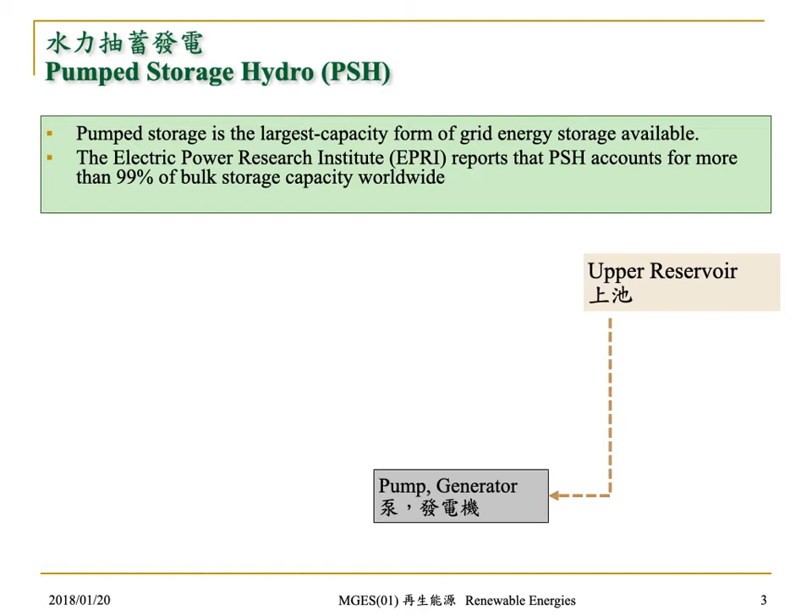Pump hydro storage is a large capacity energy storage for the grid scale at the present time. I think everybody knows the basic principle, but anyway, I'll repeat it. It stores the electricity as potential energy. They use the upper reservoir to store a huge body of water. When they need electricity, the water is released from the upper reservoir through a power generator to the lower reservoir, and generates electricity.

But when you have excess electricity, you can feed it back to the pump. The generator becomes a pump and pumps the water from the lower reservoir to the upper reservoir, storing it in the form of potential energy. The energy storage efficiency is somewhere around 70 to 80%, because of mechanical loss and water evaporation in the reservoir.

But newer pump storage also considers the environmental and biological balance. For instance, pump hydro is usually built along the river. They cut the river and bypass the water through the generator. Traditionally, fish flowing through the river may get interrupted or sucked into the power generator or the pump. To avoid that, there is usually a protection grid or mesh so the fish are not accidentally sucked into the power generator.

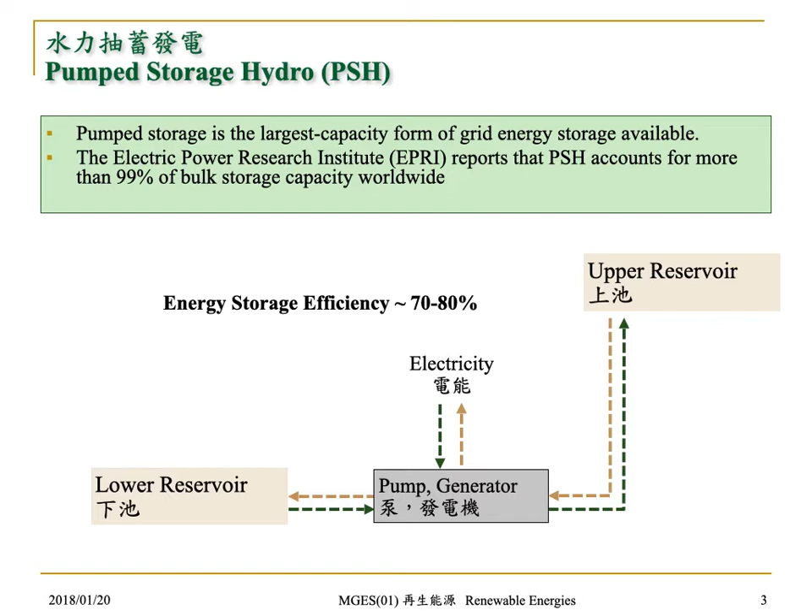Inside the power generator or pump, the turbine is made environmentally friendly, maybe coated with plastic or Teflon and without any sharp objects, so even if fish get sucked in, they will not be seriously injured. They also build a bypass so the fish can flow through the river without interruption. So newer pump hydro not only considers high efficiency, but is also environmentally and biologically friendly.

The same machine can generate electricity, which we call the generator, or become the motor to pump the water from the lower reservoir to the upper reservoir. I use a model from the pump hydro station with a cut section, which makes it easier to describe. This is the motor or power generator over here, and in front it is connected with a pump or turbine. Whether it's called pump or turbine depends on whether you want to pump the water upward, or the water from above pushes the turbine to generate electricity. So one device has two names, depending on its function.

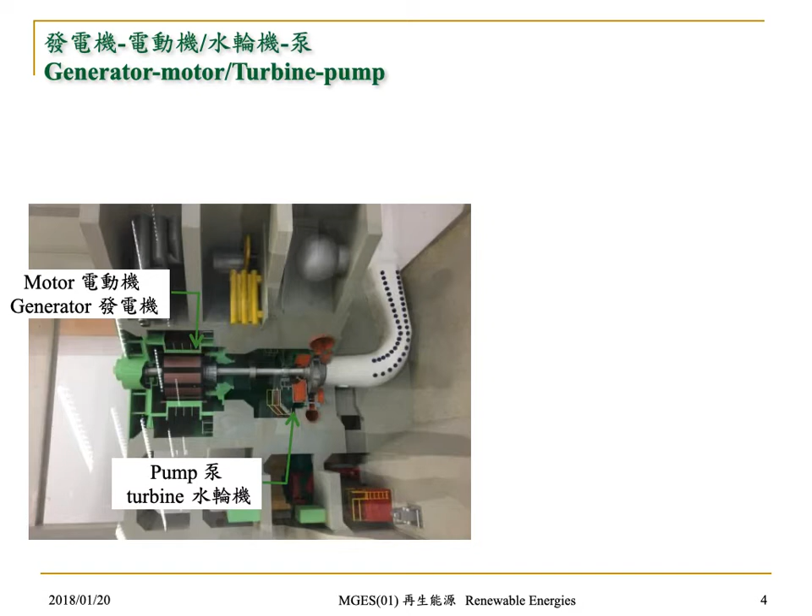This is a close-up of the turbine or pump. It rotates in one direction depending on whether it is a power generator or acting as a pump. The typical specification is given by this table. The generator output is around 300 million volt-amps, and the motor input is 283 megawatts, or 283,000 kilowatts. They are very close, and the turbine output is 275 megawatts, or 275,000 kilowatts. The turbine or pump is a very close match with the generator, no bigger, no less.

The maximum effective water drop is 400 meters, and the maximum flow rate is 82 cubic meters per second. So we can calculate the power output from the water drop times the flow rate. We know how much potential energy can theoretically be released, and then calculate the turbine output or generator output. The maximum lift is how high the pump can pump the water up. This maximum is 410 meters.

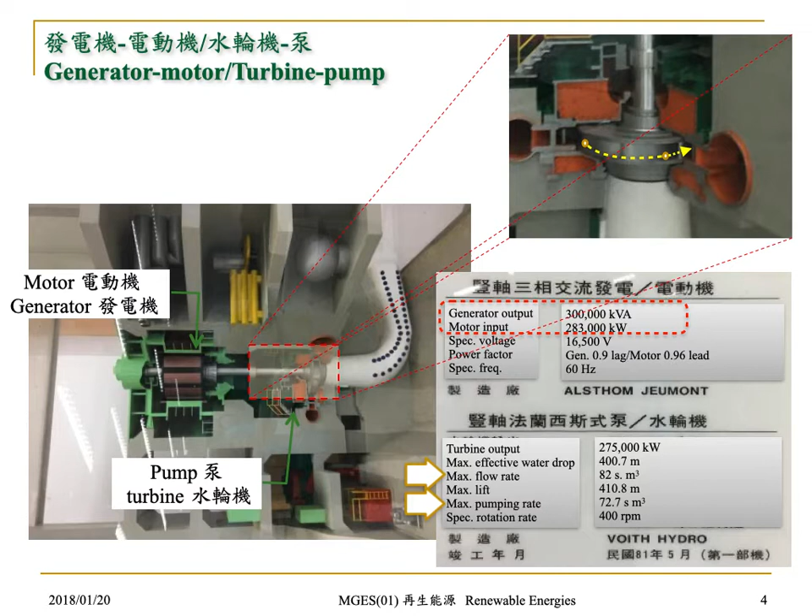In this power station, the elevation difference between the upper and lower reservoir is somewhere around 300 to 370 meters, so it's within the specification of the pump. There's no problem pumping the water from the lower reservoir to the upper reservoir. And the max pump rate is close to the maximum flow rate downward.

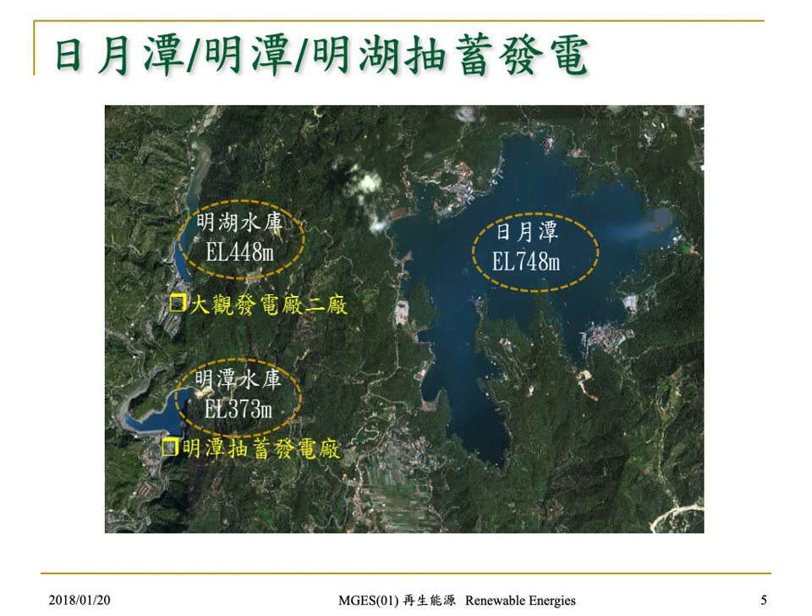And usually in the battery, for the energy storage, mostly for the battery, we'll talk about the energy density. That means how much weight or how much space is needed for batteries to store a specific energy. But not too many people talk about the pump hydro. We just do an experimental calculation, see how it will come out.

For the pump hydro, actually what is stored is potential energy, PE, equal to MGH. The M is the mass of the water, and then G is the gravitational constant. It's 9.805 meters per second squared, and then the height is the elevation difference of the upper reservoir and the lower reservoir. Let's consider an experiment.

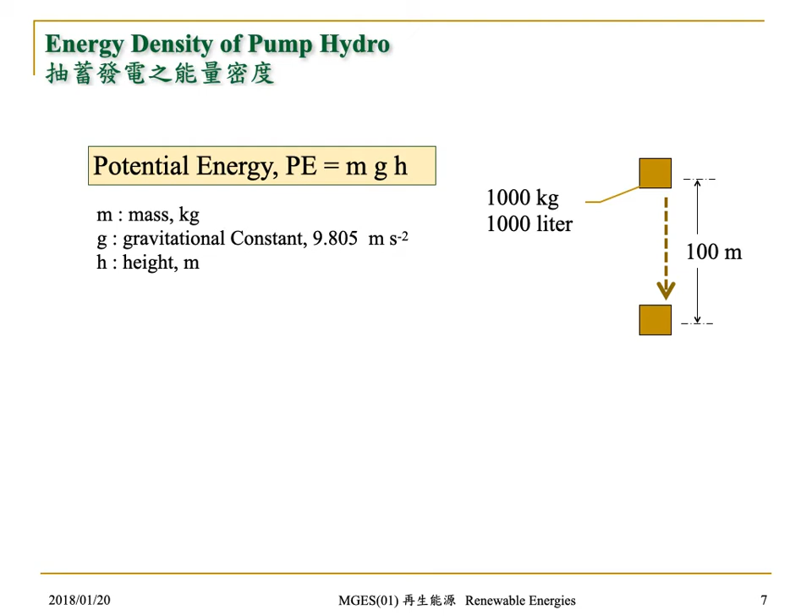We had 1,000 kilogram of water. That means 1 ton of water, or 1,000 liter, 1 cubic meter of water drop from 100 meters above, drop to the ground. And then we'll convert all the potential energy into electricity, 100%. How much electricity will be generated? We can calculate by this.

Then you can see the M equal to 1,000 kilogram times the gravitational constant 9.8, and then times the height 100 meters. Then we got 274 watt hour, or 0.274 kilowatt hour. 1 watt hour equal to 3,600 joule. So this is the energy unit conversion. So we know in this experiment we can get 0.274 kilowatt hour electricity by running 1,000 kilogram of water from the top 100 meter drop to the ground.

Now we're going to calculate the energy density. The energy density we can base on weight or based on volume. The weight is 1,000 kilogram, but the volume we have to consider is 2,000 liters. Because there's an upper reservoir and lower reservoir, we need both reservoirs in order for this operation to be feasible. So we need a 2,000 liter space. So we do the calculation. Then the gravimetric energy density is 0.274 watt hour per kilogram, or the volumetric energy density is 0.137 watt hour per liter.

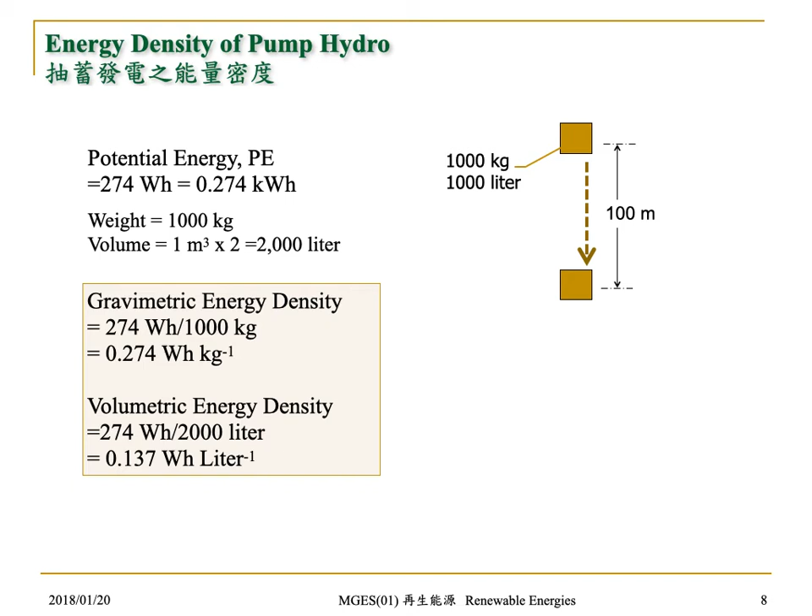So, is that good or bad, the energy density? We compare this number with conventional batteries, such as lead acid battery and the lithium-ion battery. The lead acid battery is considered the lowest energy density among all the batteries. The energy density for lead acid battery is somewhere around 20 to 50 watt hour per kilogram. It's about 100 times higher than pumped hydro. For the lithium-ion battery, it's 200 to 400 watt hour per kilogram. It's more than 1,000 times the pumped hydro. So you can see the pumped hydro energy density is much lower.

But everybody actually doesn't care about that, because usually it's in the natural environment, and it's pretty, and it also needs a big body of water, but it doesn't matter because usually it's far out west, in a remote area. You cannot do this in a metropolitan city, because the land space is limited. Then you really need a battery to do the energy storage rather than the pump hydro. The pump hydro is good for central energy storage, but not for distributed energy storage. For instance, building it in your downtown, your basement, that will be impossible.

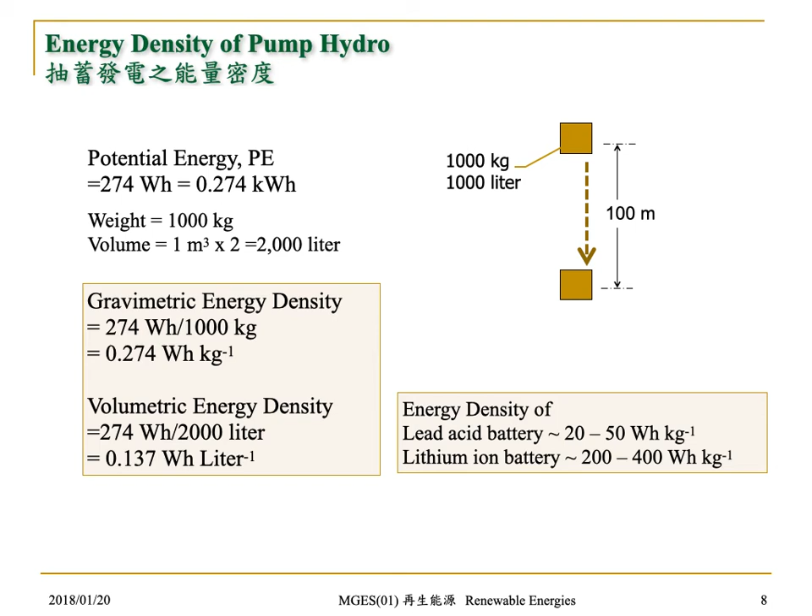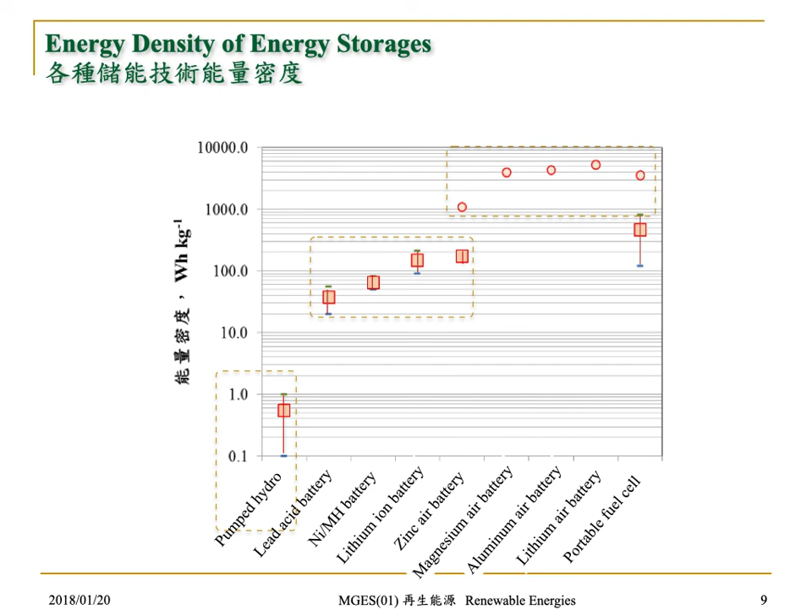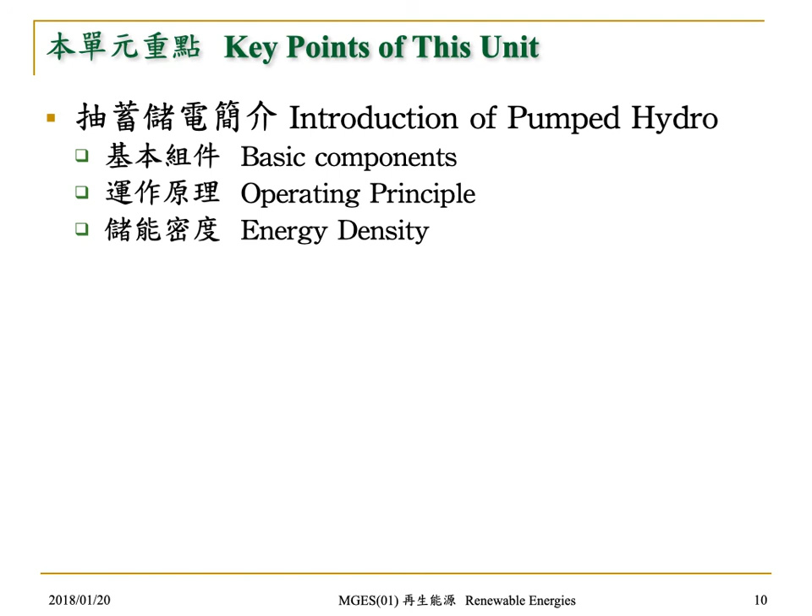So far we've been talking about the pump hydro, the basic components, operating principle, and the energy density compared with other batteries. Now we do some exercise. Let's consider how much water by volume or by weight will be needed to store 1 megawatt hour electricity. That's probably for our university maybe 1 hour, half hour energy storage. Assume the upper-lower reservoir height difference is about 30 meters, somewhere around 9 to 10 stories height. The conversion efficiency is 70%. The equation is PE equal to MGH. You can substitute and then do the number crunch.

Over here, I assume you use a 5,000 kilogram water tank, one on the roof and the other one stored in the basement of the building. How many water towers or water tanks do you need to store 1 megawatt hour electricity?